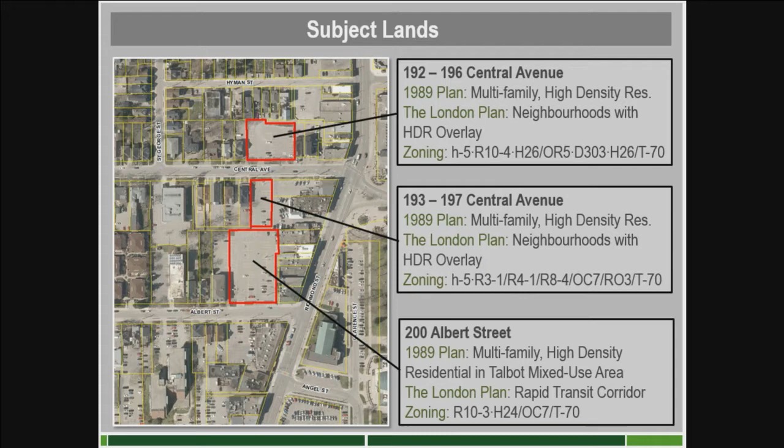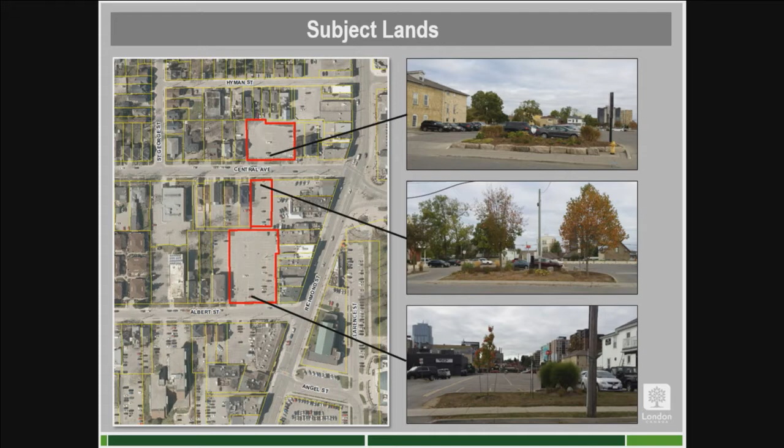The properties underwent site plan approval for commercial parking lots in 2005, 2009, and 2012 respectively, going from the top of the slide to the bottom of the slide. The temporary use which had been applied to the property expired on June 24th, 2017, after the application for renewal had been submitted to the planning department. So just up front, the ask is to extend the temporary commercial parking lots for an additional 3 years, and our recommendation is for approval.

The context for the planning review included review of the provincial policy statement, which talks about development of complete communities and efficient use of land. The 1989 official plan sets out a number of criteria for the review of temporary uses, and they're listed in summary on the slide there.

The London plan essentially has the same criteria as the 1989 plan, except for an additional one which talks about the possible frustration of the viability of the intended long-term use of the lands, which is a bit of a variation on potential long-term use from the 89 plan.

We also looked at our Move Forward London downtown plan. It identifies 200 Albert Street and 193 to 197 Central Avenue as underutilized sites, and it also identifies 200 Albert Street as a redevelopment opportunity site.

The downtown parking strategy was kind of interesting for this particular application. These properties lie just north of the northerly boundary of the study area, so they're not technically inside the study area for the downtown parking strategy. But because they are in really close proximity to the study area, and because of the role of these particular parking lots in supporting the downtown and Richmond Row, we took into account the parking strategy for this application.

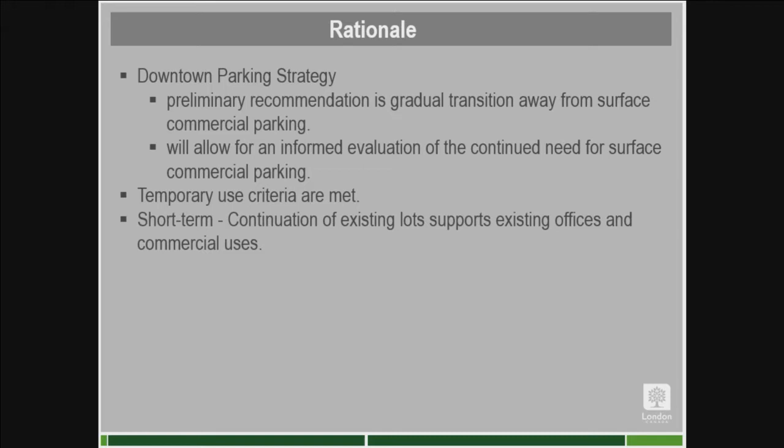The application meets the temporary use criteria of both the 1989 plan and the London plan. In the short term, the continuation of the existing lots supports existing offices and commercial uses, both in the downtown and along Richmond Row. In the long term, the accompanying existing zoning that rides with these properties allows for a broad range of future development opportunities.

So the opportunities are there, it's just up to somebody to take advantage of those. And there will be no further impact on potential redevelopment in the future.

So in summary, we feel it's appropriate at this time to extend the temporary parking lots for an additional 3 years, noting that in 3 years' time the parking strategy, I suspect, will be in place at that point, and we would have a different set of information to evaluate in reviewing such an application.

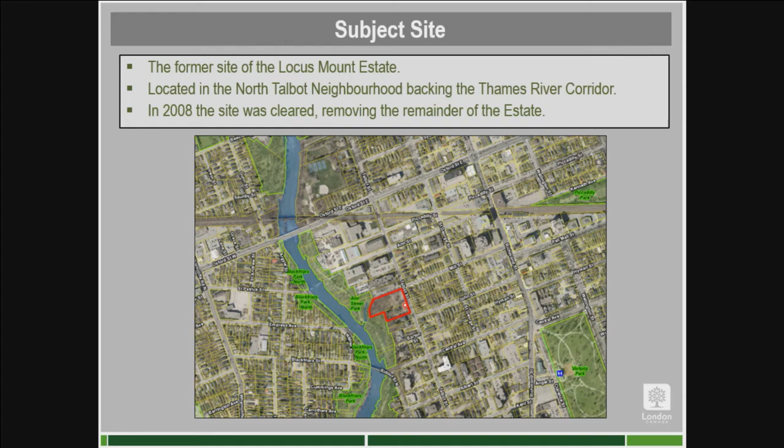Mr. Cork: Thank you, Madam Chair. As you mentioned, the subject site is located at 661-667 Talbot Street, highlighted in red on your screen. It's the former site of the old Locus Mount Estate, located in the North Talbot neighborhood, and the site backs onto the Thames River corridor. In 2008, the site was cleared, removing the remainder of the estate, which had a fire on the property. Here's the context of the site within the surrounding area.

So you can see to the north there's apartment uses that get higher, and some industrial type uses, and then the surrounding residential and corridor behind the site.

A little brief history on the subject site: there were previous applications made back in 2013 - a site plan application for a 14-story, 158-unit apartment building, as well as a minor variance requesting an increase in height from the permitted 10 stories to 14 stories, with reductions in setbacks and parking. The proposed development included 4-bedroom dwelling units. However, during the site plan process, the near campus neighborhood policies came into effect, reducing the maximum number of bedrooms to 3 per unit. Due to this loss in bedrooms, the applicant withdrew their application.

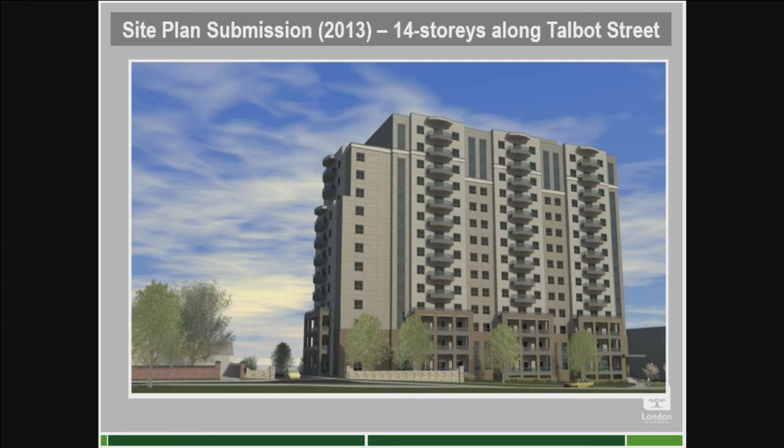They moved forward with the rezoning last year. So here's what the site plan submission looked like - this would have been approved if not for the near campus neighborhoods policy coming into effect. We have 14 stories along Talbot Street in an L-shaped building, with 14 stories going back along the north section of the property.

The revised application that came in was to permit an apartment building of 16 stories in height with 236 units, to make up for the loss of the 1 bedroom in all those units. Again, same shape as the previous building - 16 stories now along Talbot Street and along the north portion of the property.

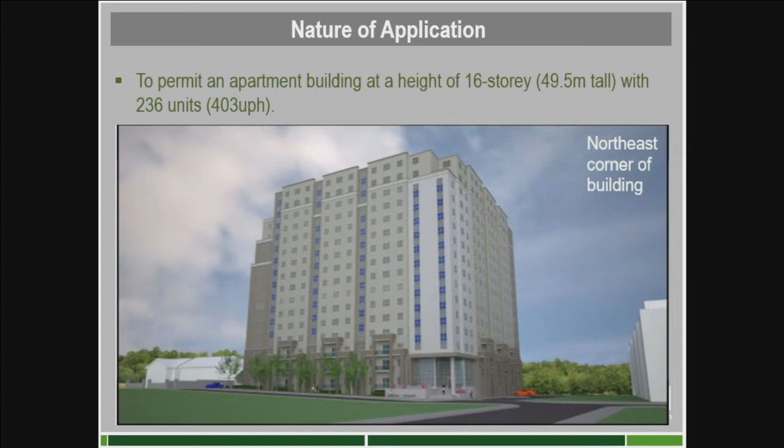Through communication with the applicant, we expressed some concerns with that previous design, the massing and the materials, as well as heritage concerns and public concerns. So they revised the drawing a bit - much nicer elevations were provided. However, the massing is still quite large along Talbot Street and the north portion, and doesn't respond to the surrounding community.

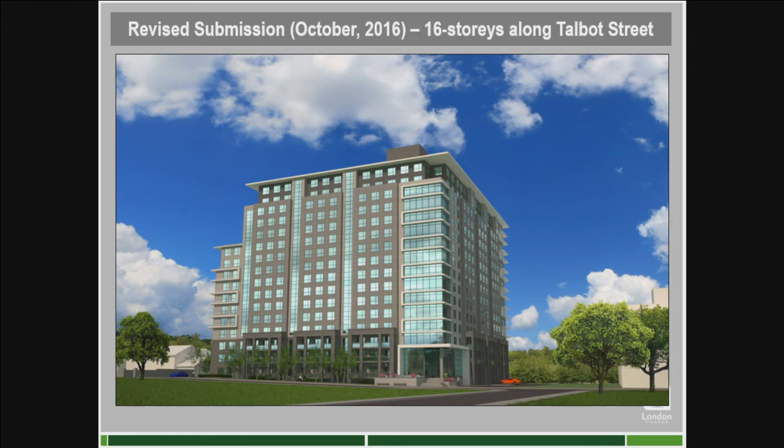So we had further consultation with the applicant and discussions about the proposed form, and they revised their drawing one more time for us - it's quite an extreme difference. This resulted in a revised application that we recirculated to the community. Again, the height stays at 16 stories and the unit count stays the same. However, we now get a building with a 3-story section along Talbot Street, which then steps back to an additional 7 stories.

16 stories of height will be provided along the rear of the site and the north portion abutting existing apartments. There will be 133 underground parking spaces and 38 surface parking spaces.

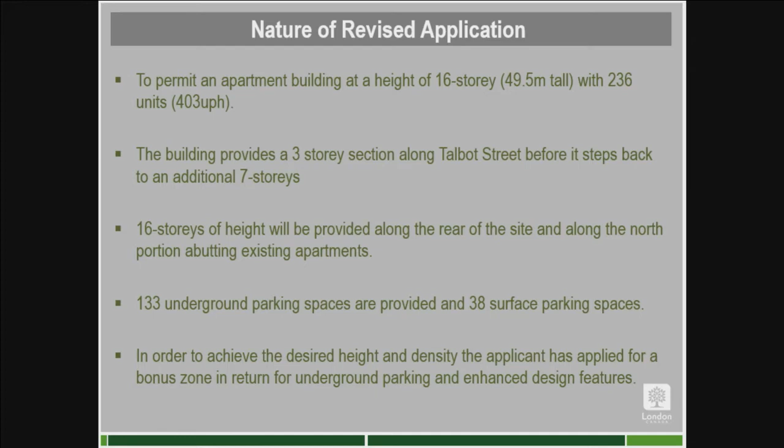In order to achieve the desired density and height, the applicant has applied for a bonus zone in return for the underground parking and enhanced design features being provided.

Here's a rendering of the final design that we received. As you can see, it's quite different. All the massing is pushed to the back corners where it has less impact on the surrounding properties, and we have a 3-story section along the front to respond to the abutting heritage properties and residential houses across the street.

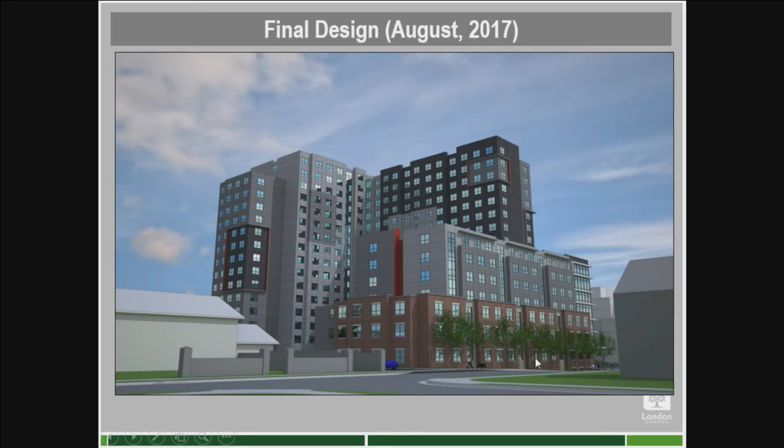Through the circulation, some public concern was raised. First, we'd like to note that the notice of public meeting did not make it out to the North Talbot Community Association. This was left off in error, and we apologize for the mistake. Staff was aware, however, that the main contact does live in the circulation radius, so our mailouts do go to the individual who is the main contact for the neighborhood association.

Through the process, staff responded to all relevant questions of the association and the individual, reviewed the comments and file material thoroughly with them. Staff wants to make council aware that the statutory notification requirements have been fulfilled for the application.

Some of the other main concerns are the environmental and species at risk that could be on the site. Obviously there's heavy vegetation on the rear slope. People were concerned about the removal of trees and potential impacts on species at risk.

Just to be clear, the rear portion of the site is already zoned Open Space 4, protecting these lands from development and tree removal. In fact, through the application, we got to increase that open space zone and take it as land dedication through the site plan process.

The proposed development will occur in an area outside of the stable slope within an approved development area. This development limit was established through the site plan process, in consultation with staff and the Upper Thames River Conservation Authority. During the site plan approval process in 2013, we accepted a subject land status report and had no concerns about the potential development impacts on the site.

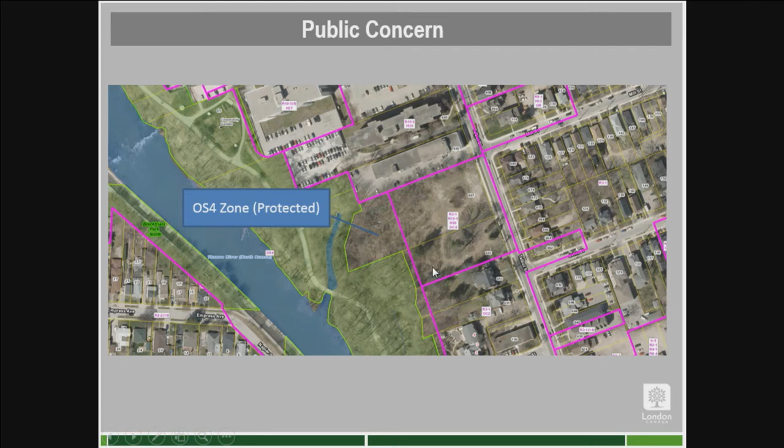A couple other concerns that were raised: pedestrian traffic. There was concern about the potential closure of the sidewalk during the construction period, and lack of available street crossings on Talbot Street. The only signalized intersections are all the way at Oxford Street and Central, so if an individual is walking down, they'd have to backtrack a long way to reach a signalized intersection. The applicant will be required to identify and provide alternative movement solutions through their traffic management plan as part of site plan approval.

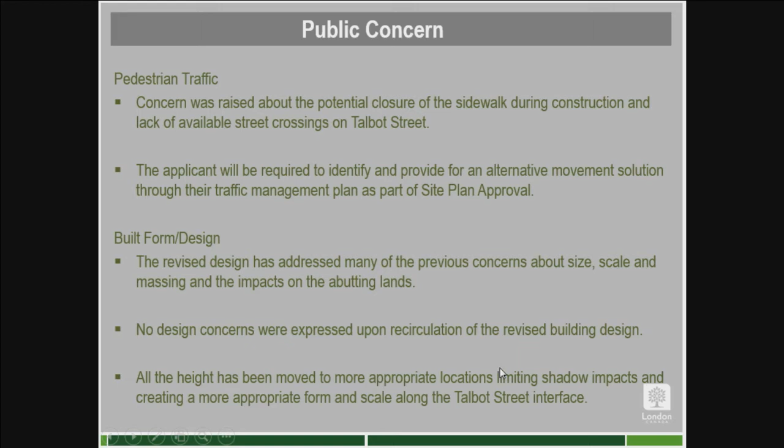Another major concern, for both staff and heritage staff, is obviously the built form and design. However, the revised design has addressed many of these previous concerns about size, scale, and massing, and the impacts on abutting lands. No design concerns were expressed upon recirculation of the revised application—only one comment was received. All the height has been moved to more appropriate locations, limiting shadow impacts and creating a more appropriate form and scale along the Talbot Street interface.

In terms of the official plan, the site is already designated as high-density residential, and the proposal is in keeping with the relevant policies of the official plan and provincial policy statement. The proposed form takes into account the surrounding land uses and responds to the existing height scales and setbacks of the surrounding homes and apartments. The development maintains a similar character along Talbot Street and responds to the abutting heritage homes to the south through the use of brick material and a 3-story built form before it steps back to provide additional height.

Adequate municipal services exist in the area to accommodate the increases in density. Talbot Street is a primary collector road with capacity to accommodate any potential increases in traffic without affecting the surrounding community. A separate left turn lane will be required into the north portion of the site, where the majority of cars will enter and exit, ensuring traffic flow continues on Talbot Street. The site's close proximity to transit, public open space, convenient shopping, and service facilities also provides justification to permit an increase in density on the site.

Because the site is vacant, it does meet the definition of residential intensification. Therefore, the applicant had to provide a character and compatibility report as outlined in the official plan. Through several iterations of the building design, the applicant reshaped the original massing from a 16-story L-shaped building into a U-shaped building of varying heights to better fit within the existing context. In addition to the multiple height changes and step backs, the variety of materials and colors further breaks up the massing and helps it be more compatible with the community. Staff are satisfied that the proposed development now maintains the character of the area.

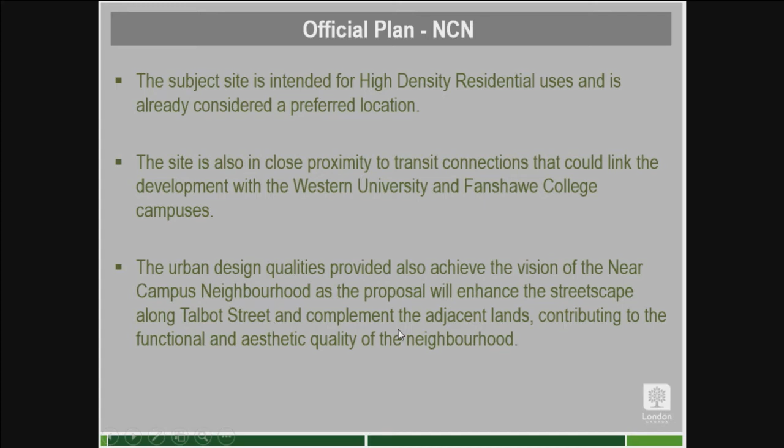The subject site is also located within the near campus neighborhood. This area provides a policy context to ensure compatible development at appropriate locations and intensities. The policies outline land use planning and urban design goals to help achieve the vision of the near campus policies. The proposed apartment building accomplishes many of these goals, providing an appropriate form of intensification without undermining the long-term vision of the near campus neighborhoods. The subject site is intended for high-density residential uses and is already considered a preferred location. It is also in close proximity to transit connections that could link the development to Western and Fanshawe College campuses, and the urban design qualities achieve the vision of the near campus neighborhood as the proposal will enhance the streetscape along Talbot Street and complement adjacent lands, contributing to the functional and aesthetic quality of the neighborhood.

As mentioned, they were required to apply for a bonus zone. The current zoning permits a density of 250 units per hectare and a maximum height of 30 meters or 10 stories. To exceed these limits and achieve the desired 403 units per hectare and 16 stories, the applicant was required to make this rezoning application. Through the planning application review process of the bonus zone, a development design has been achieved which supports the city's urban design principles. The bonus zone will be site-specific, intended to facilitate the development and design which will permit the U-shaped building previously shown, directly tied to the enhanced urban design details described in staff's report and recommendation.

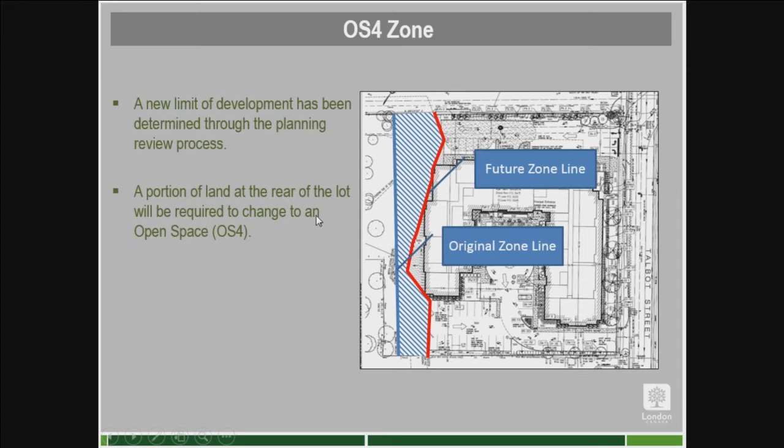Just a technicality, referring back to the movement of the zone line. Through the process, a development limit was established. The red line is that development limit and will be the new future zone line. The blue line is the original zone line, and the lands in between will be changed from the existing residential zone to an Open Space 4 zone to protect those lands, which will also be included in the lands dedicated to the city through site plan.

The London Plan recognizes lands that were previously identified for high-density residential uses. The subject site is one of those areas considered a remnant high-density residential use. These remnant high-density lands are subject to specific policies through the London Plan to implement future uses. These lands would be restricted to a maximum height of 12 stories under the London Plan, and the recommended density is not applicable as the London Plan does not use densities to regulate development.

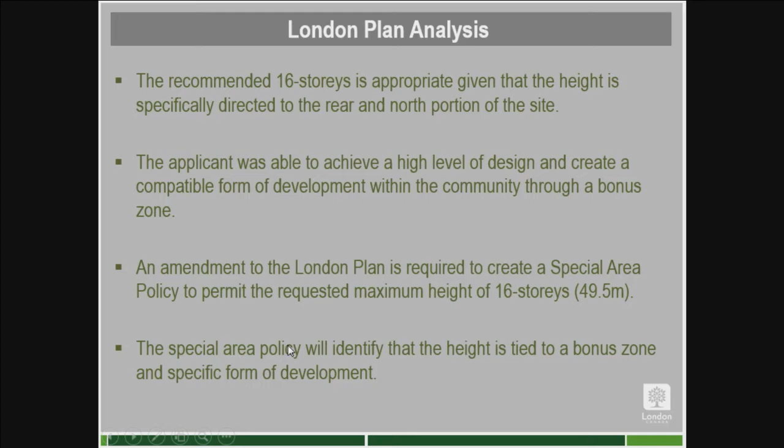Staff feel the recommended 16 stories is appropriate given that the height is specifically directed to the rear north portion of the site. The applicant was able to achieve a high level of design and create a compatible form of development within the community through this bonus zone. However, recognizing that 16 stories does require an amendment to the London Plan through the creation of a special area policy to permit the requested maximum height of 16 stories. So to ensure that in the future we don't receive 16 stories along Talbot Street, where we worked very hard to remove it, the special area policy will be directly tied to the bonus zone to ensure a specific form of development is achieved. Questions?

Councillor Hopkins: I have one question about the OS4. Why not an OS5? Through you, Madam Chair, it was an OS4 because the corridor behind there is all zoned OS4, so it's just to be in keeping with the entire corridor.

Councillor Turner: Thank you, Madam Chair. Just with respect to the UTRCA circulation from August 25th, 2016 that came through today, I recognized that was 2016. So have all the concerns raised in this memo been addressed to the satisfaction of the Upper Thames River Conservation Authority? Thank you.

Any other questions at this time? Seeing none, would the applicant like to speak?

Honorable Mayor, Madam Chair, members of the Planning Environment Committee, and city staff, my name is George Bekas, Manager of Land Development for Drewlo Holdings and Planner. I'm the agent for the application for Drewlo Holdings to amend the zoning bylaw number Z1 relating to the property located at 661 and 667 Talbot Street.